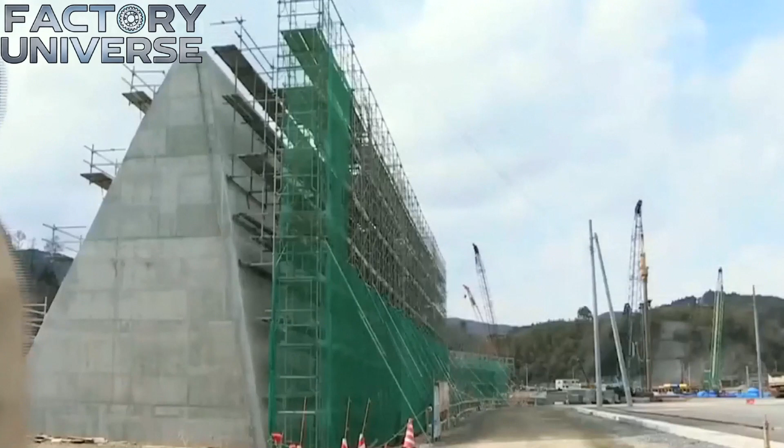20,000 people lost their lives in 2011, and hundreds of thousands of homes were completely obliterated when a tsunami 50 feet in height struck the coast of Japan. This catastrophic event left the international community in a state of profound shock and mourning. Why was such a high price paid in human lives and infrastructure?

At first glance, the natural defense systems of the time seemed sufficient. But in reality, the sheer force of the water overwhelmed every existing barrier, proving that a much more massive and sophisticated engineering solution was required to prevent a repeat of the disaster.

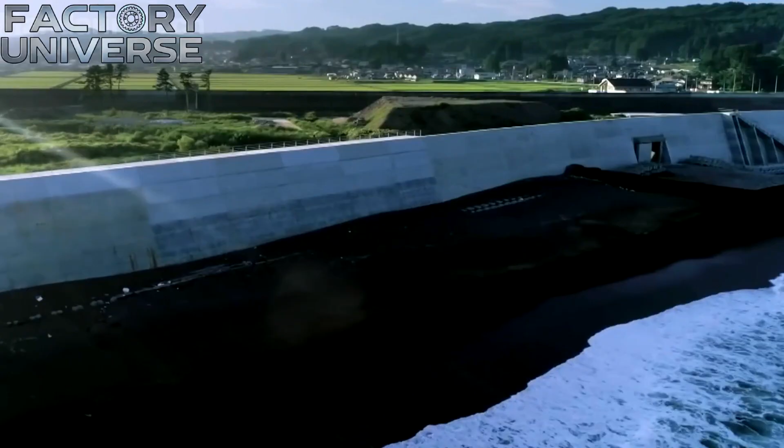Japan initiated the construction of a colossal tsunami defense wall, spanning nearly 250 miles along its vulnerable eastern coastline. But this is just the beginning. The process is only gaining momentum as the scale of the task demands unprecedented resources and precision. One can notice how tens of thousands of engineers and construction specialists are mobilized across the shoreline to manage the logistical complexity of the project.

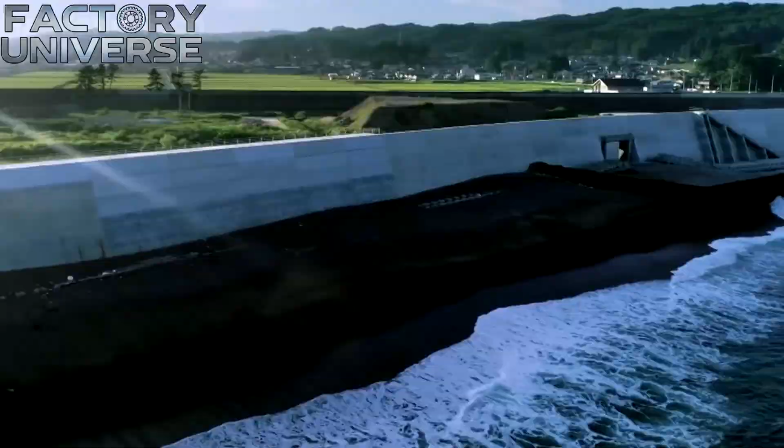To construct barriers reaching heights of 50 feet, they utilize world-class machinery capable of pouring and shaping millions of tons of high-strength concrete. It is visible how the heavy equipment moves with mechanical rhythm, positioning steel reinforcements and enormous blocks that must absorb the kinetic energy of the ocean. Each section of the barrier is calibrated down to the last millimeter to ensure structural integrity under the weight of millions of tons of rushing water.

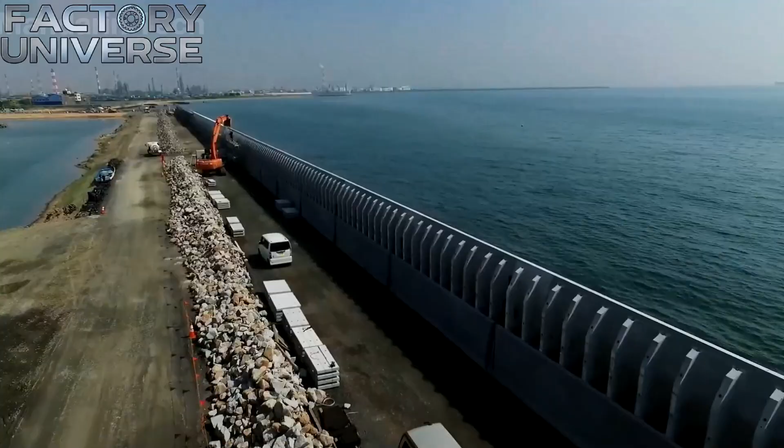Everything only gets more complicated when considering the long-term effectiveness of such a massive undertaking. The process does not end at the completion of the physical structure itself. One big question remains regarding whether this concrete Great Wall can truly provide absolute protection against the unpredictable tsunamis of the future. The structure stands as a testament to human engineering and resilience in the face of nature. The massive concrete panels now line the horizon, where the barrier meets the sea in a quiet, gray expanse.

4 massive tectonic plates converge directly beneath the Japanese archipelago, creating a geological junction of extreme instability. Why does this specific seafloor location generate more than 500 earthquakes every single year? The answer lies in the constant grinding and slipping of the Earth's crust as these plates collide under immense pressure. But this is just the beginning.

When these geological plates shift suddenly beneath the ocean floor, the entire seabed can rise or sink within seconds. This sudden deformation of the Earth pushes up enormous volumes of water, creating tsunami waves dozens of feet high. These waves accelerate toward the shoreline with the concentrated force of millions of tons of water. One can notice how the ocean surface seemingly transforms into a solid, moving wall.

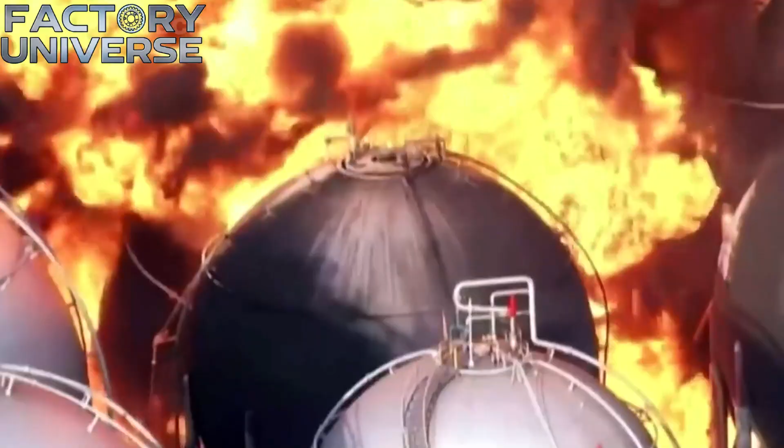In previous decades, residents of small coastal towns instinctively ran toward high ground the moment the Earth began to shake, responding to red alert warnings broadcast over loudspeakers. At first glance, these precautions seem sufficient, but in reality, the scale of natural forces can exceed any historical precedent. March 11, 2011, provided the most devastating proof of this persistent danger.

A magnitude 9.0 earthquake ruptured more than 300 miles of a tectonic plate boundary deep under the Pacific Ocean. The resulting tsunami reached heights of nearly 50 feet, far beyond any defense mechanism the nation had ever prepared for. It is visible how such a volume of water can bypass any standard obstacle. That single wave took more than 20,000 lives and flattened over 120,000 homes. The disaster triggered a catastrophic crisis at the Fukushima nuclear power plant.

It gets more complex further on. Existing seawalls had been designed only for waves up to 26 feet, causing them to be completely overwhelmed as the water surged over their crests. Japan quickly recognized that while the earthquake caused the initial damage, the tsunami acted as the primary destroyer of the coastal infrastructure. Nearly 250 miles of tsunami defense walls now line the northeastern coast as a result of this realization.

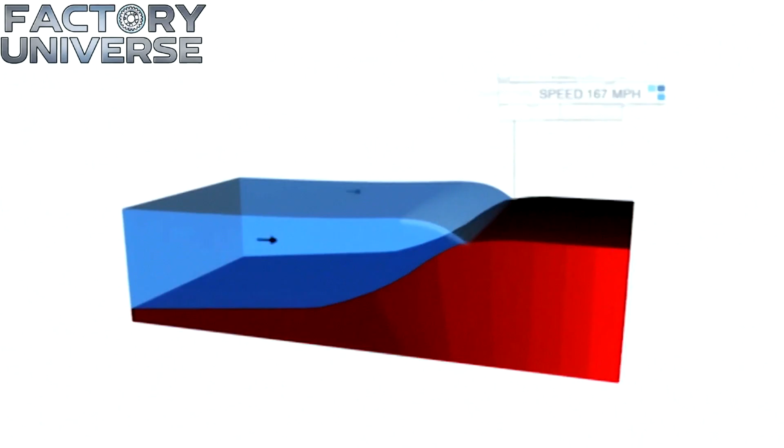Each structure stands between 45 and 50 feet tall, with heavy foundations plunging 80 feet deep into the ground. Everything only gets more complicated when considering the engineering required to anchor these massive concrete barriers. The government invested more than $12 billion not only into the construction of these walls, but also into the complete upgrading of emergency alerts and evacuation routes.

One can notice the precision of the new concrete blocks, forming a continuous line against the horizon. The equipment gradually moved millions of tons of material to ensure the foundations reached their required 80-foot depth. This concrete Great Wall is designed to buy precious minutes for residents to reach safety before a wave arrives. It does not end at this stage.

Automated sensors now link the walls to centralized warning systems that trigger the moment a plate shift is detected. The process of fortification serves as a physical commitment to preventing a repeat of the 2011 tragedy. The massive structures stand silent and ready, marking the completion of this phase of coastal protection.

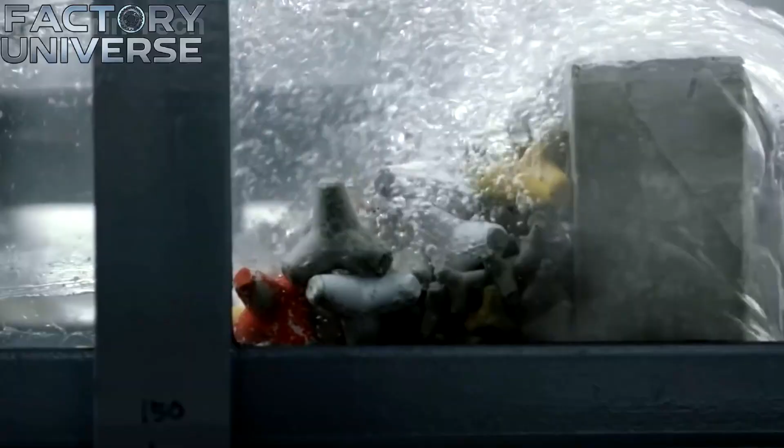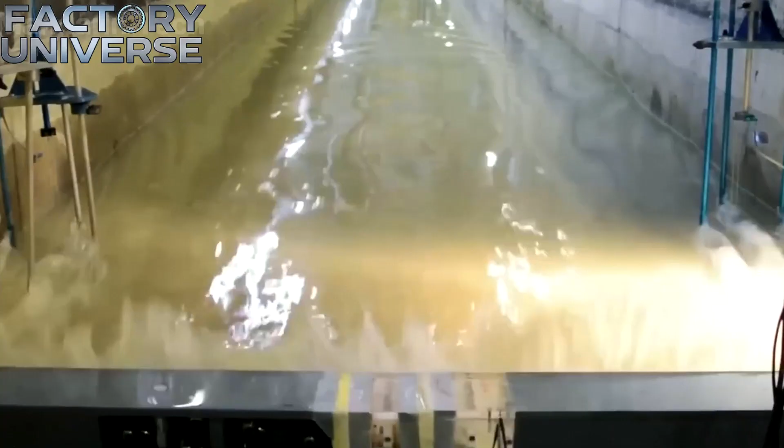14 meters. This is the minimum required height for the colossal concrete barriers designed to shield the Japanese coastline. Why is such an immense scale necessary for a structure that remains dry for decades? At first glance, a wall is a simple physical obstacle, but in reality, its geometry must counteract the fluid dynamics of a multi-ton surge that behaves more like a moving wall of earth than water.

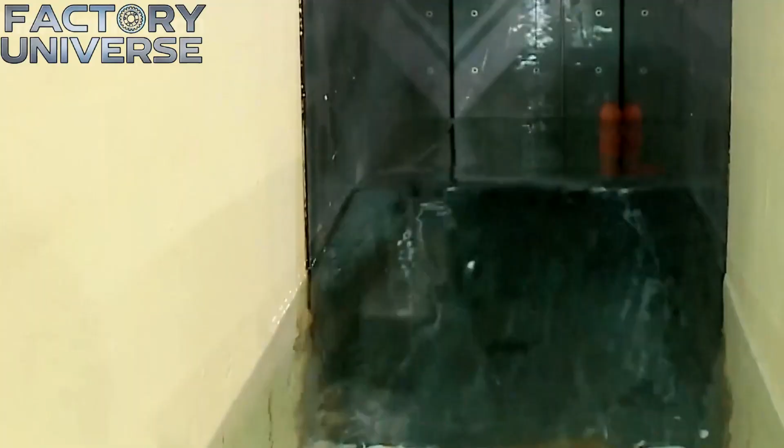The process begins not with concrete, but with the systematic analysis of every data point recovered from the 2011 disaster. Engineers meticulously reconstructed the destructive force of the waves within specialized artificial wave tanks. One can notice how hydraulic actuators push the water to mimic the exact frequency and velocity of the historical event. These scaled-down models allow the team to observe how the liquid mass hits the surface and eventually overtops the barrier.

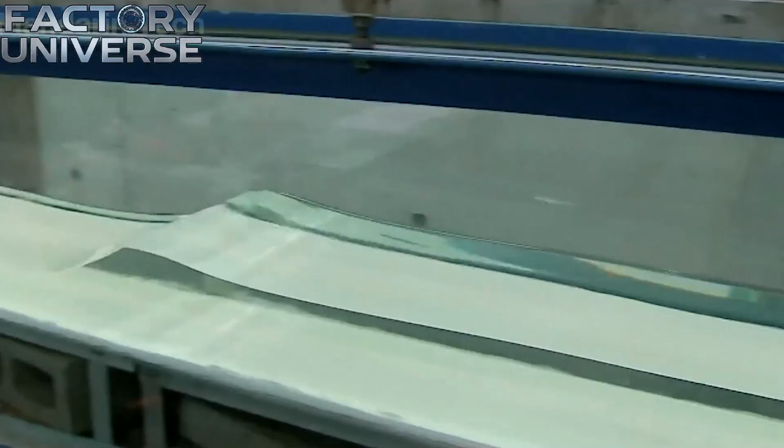It gets more complex further on. The research phase does not end at this stage. Scientists continuously adjusted the thickness, the vertical slope, and the overall height of the wall based on how the miniature models responded to varying pressures.

It is visible how the water creates a vacuum effect and a massive lateral push that could easily topple a standard structure. To counter this, the design moved toward a wide trapezoid base that lowers the center of gravity and distributes the weight more effectively. Only after the models demonstrated peak performance did the engineering team finalize the technical blueprints.

The foundations are driven 20 to 25 meters deep into the earth to anchor the structure against the immense kinetic energy of a surge. These deep piles ensure the wall is not pushed over or undermined when the water levels rise past the top edge. Everything only gets more complicated when considering the internal structure. A reinforced steel core provides the necessary tensile strength to prevent the concrete from shattering under impact.

The final specifications call for a height of 14 to 15 meters, creating a massive shield capable of withstanding the most extreme geological events. The design phase successfully concludes, providing the foundation for the massive construction efforts that follow.

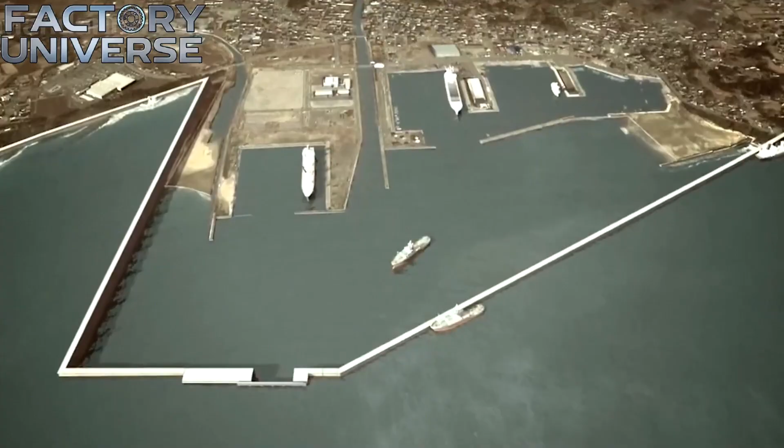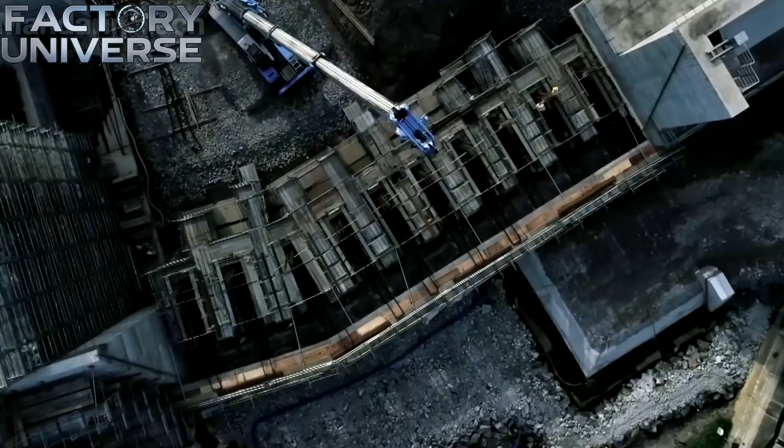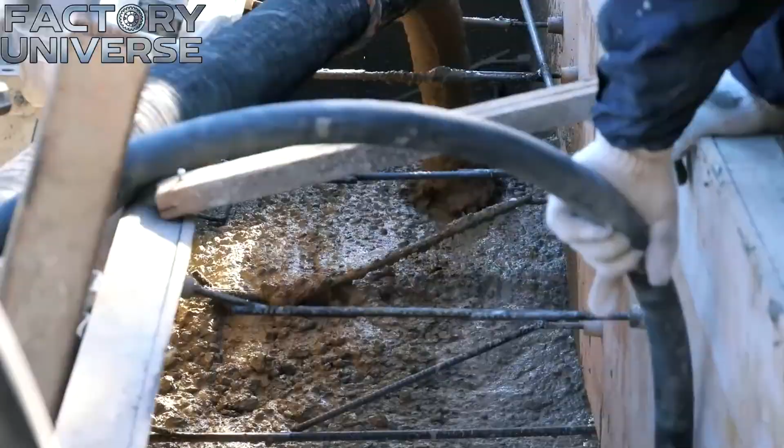400 kilometers is the total length of the massive coastal defense line spanning the Tohoku region in northeastern Japan. Why was such an immense distance selected for a single unified project? After the catastrophic events of 2011, engineers determined that only a continuous barrier through the prefectures of Aomori, Iwate, Miyagi, and Fukushima could provide the necessary protection. This stretch now represents the longest and most integrated defensive fortification in the history of the nation.

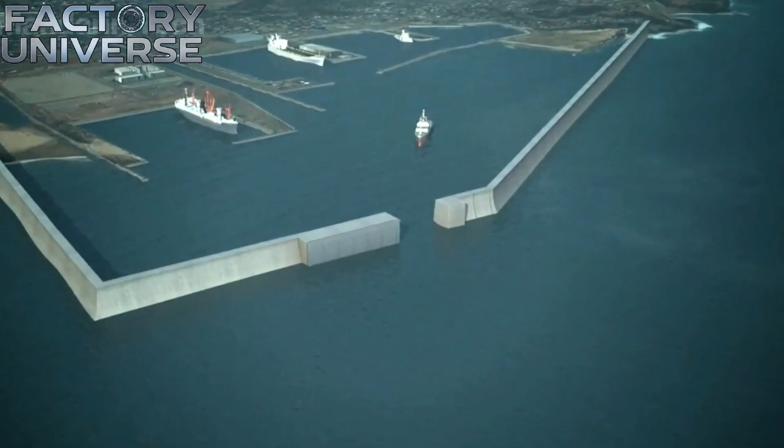Crews began the process by clearing the designated route of all remnants from the previous disaster. One can notice how hydraulic manipulators systematically remove destroyed infrastructure, power lines, and old pipelines to create a clean corridor. But this is just the beginning. Logistics hubs and concrete mixing stations were established immediately along the coastline to ensure a constant supply of materials.

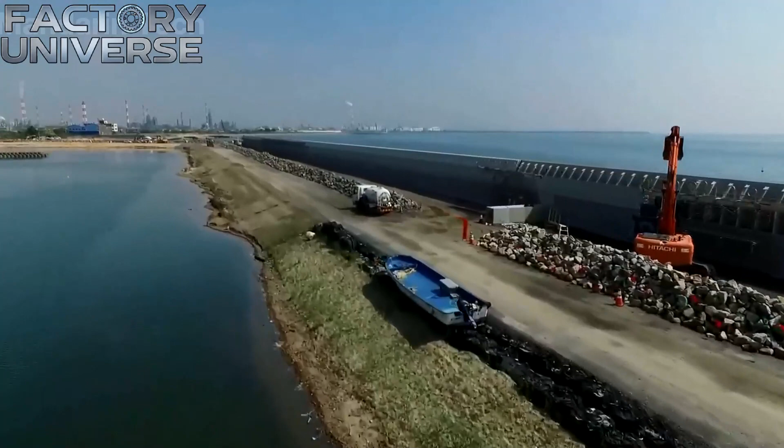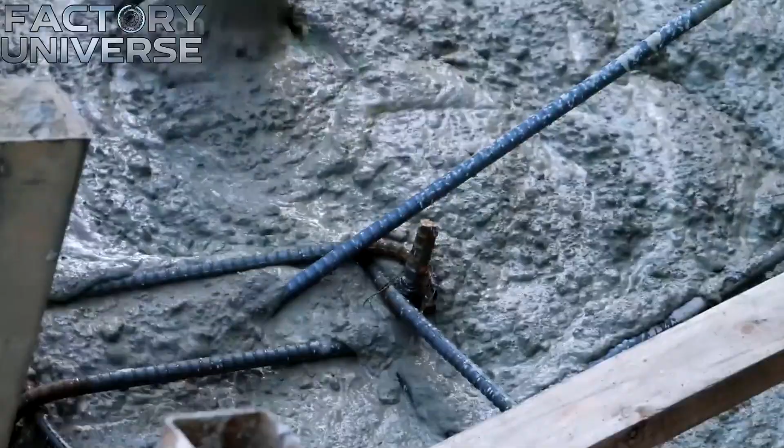Because the rainy season in Japan can halt most industrial activity, workers installed temporary drainage systems and specialized crane platforms to maintain the pace of construction regardless of the weather. It looks outwardly simple to prepare a site, but in reality, the proximity to the ocean requires constant monitoring of the water table. Engineers focused their attention on the weak, sandy soil that characterizes much of the Tohoku coast.

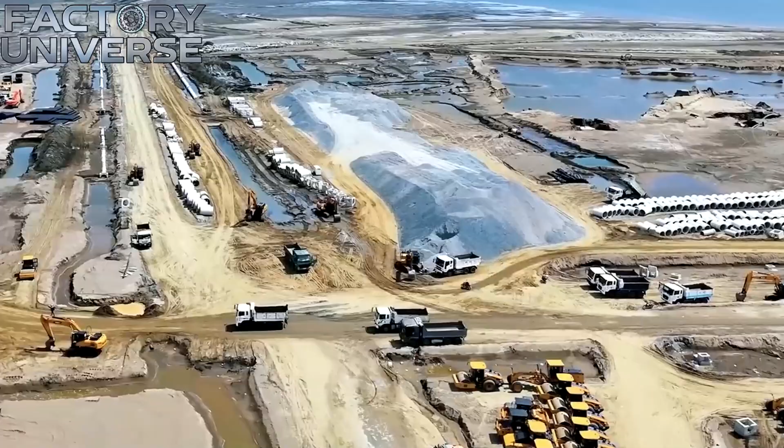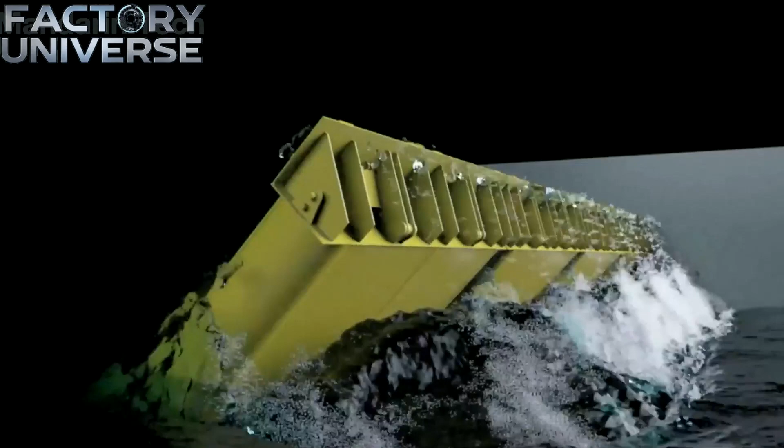It seems simple to build on the shore, but in reality, the weight of the structure requires massive ground reinforcement to prevent sinking. They drilled detailed geological surveys before driving deep concrete and steel piles into the earth to find stable strata. Layers of crushed stone and sand were added and then compacted using heavy vibrating rollers to create a base that will not slide or crack under the weight of a wall tens of meters tall.

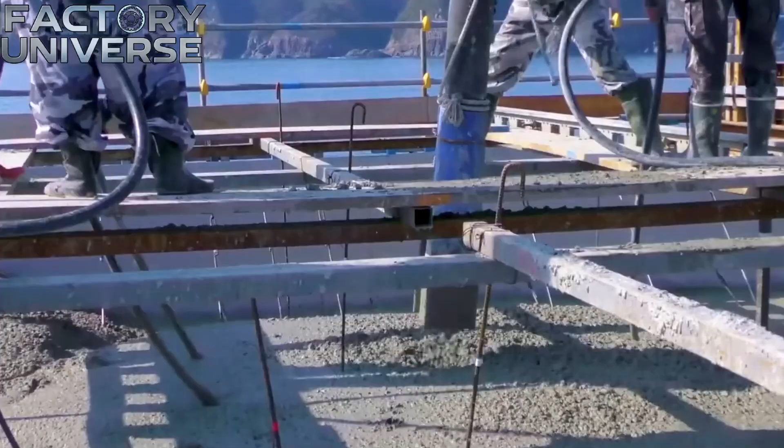Excavators dug foundation pits that reached depths of more than 20 meters in specific sections. Near the shoreline, crews built temporary cofferdams to keep the seawater from flooding the active work zones. The process is only gaining momentum.

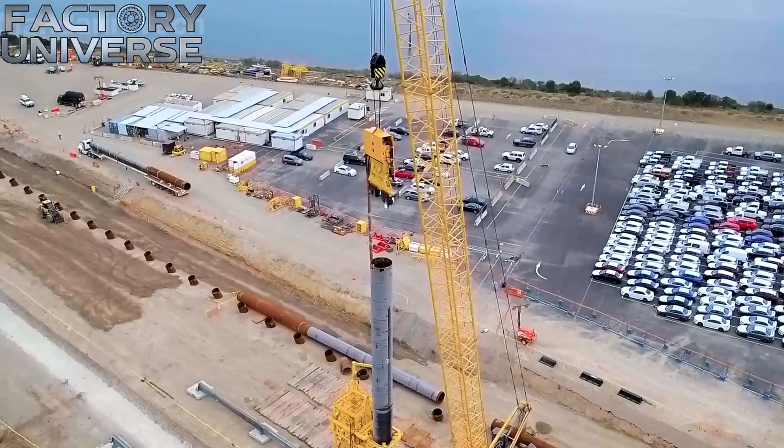Once the pits were cleared, a base layer of concrete was poured to serve as the platform for dense steel reinforcement cages. These foundation blocks are built with an extremely wide footprint to ensure the wall cannot be overturned by the massive kinetic energy of a surge.

Workers assembled thick rebar cages above these foundations, following the precise specifications developed during laboratory testing. One can notice how the formwork is positioned before concrete is pumped into the molds in a continuous stream.

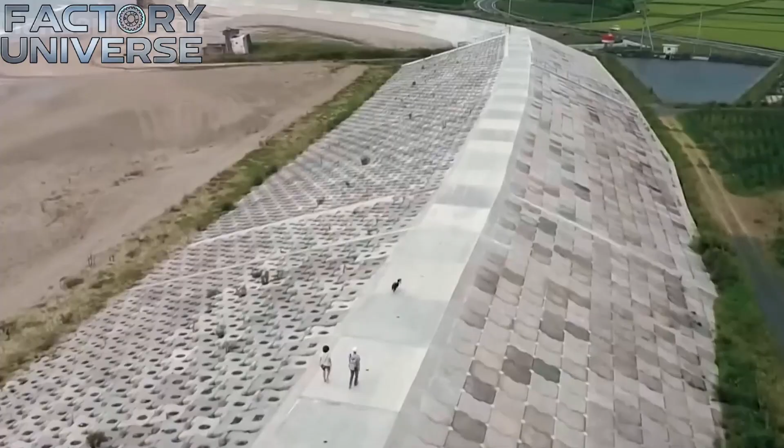Each block, typically measuring several dozen meters in length, undergoes a strict cycle of pouring, curing, and inspection. These individual sections are then connected to one another to form a single unbroken barrier along the Pacific edge.

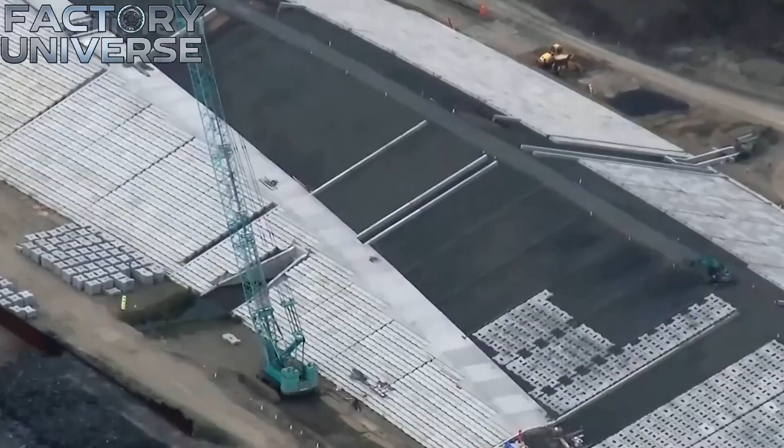Specialized energy-dissipating units like tetrapods and dolos are installed on the ocean-facing side of the structure. These concrete blocks are stacked in multiple dense layers at the base to break the initial force of a wave before it ever touches the main wall. Everything only gets more complicated as the terrain changes.

Some sections utilize stepped faces or sloped surfaces to reduce the height of water surges, while the landward side is reinforced with crushed rock and drainage channels to prevent the accumulation of rainwater.

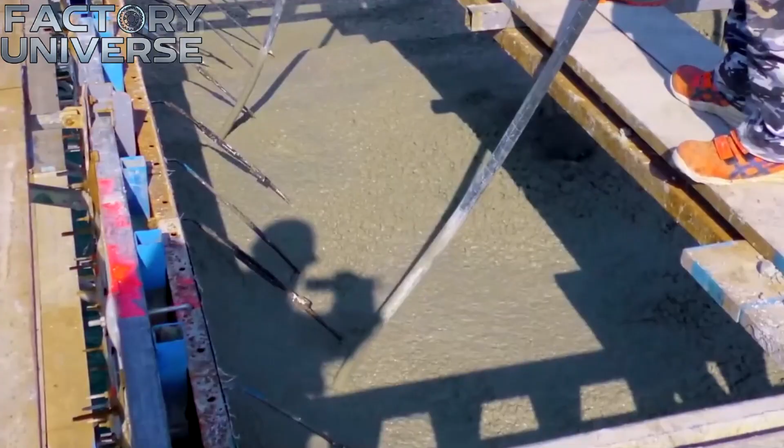The top of the wall often serves a dual purpose as a public walkway or a local roadway for the town. Railings and safety ladders are integrated into the final structure to allow for safe access and maintenance. Transition to the next level.

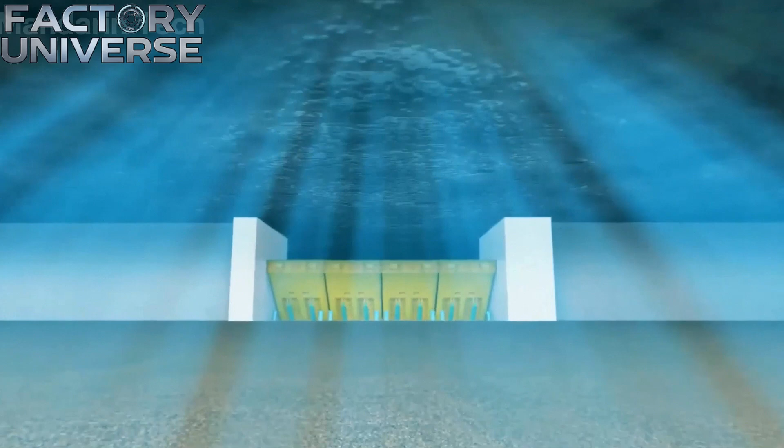Because the project spans nearly 400 kilometers, engineers made minor adjustments to the design to account for variations in coastal depth and soil composition without altering the core architectural principle. Interlocking precast concrete blocks were added to the outer surface in areas requiring extreme impact resistance.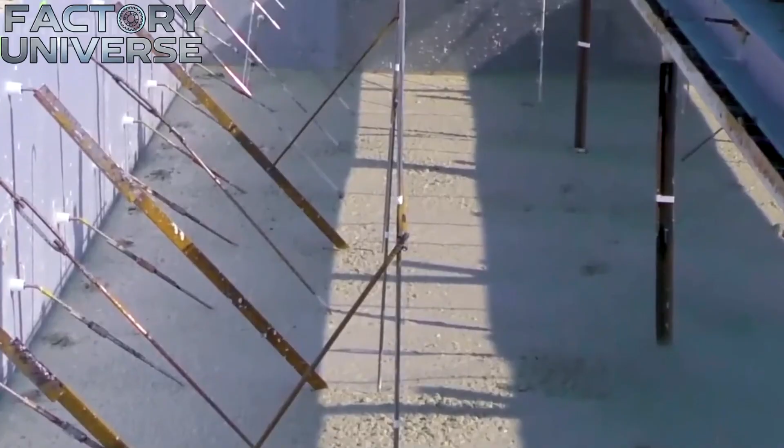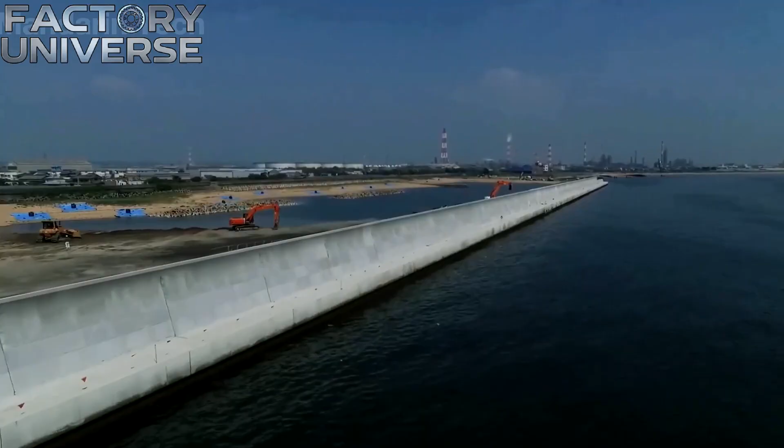One can notice the crane lifting these panels into a tight, uniform pattern that functions as a reinforced armor layer. This protective skin is designed to withstand decades of constant erosion and the relentless pounding of the Pacific Ocean.

Special entry points had to be engineered for busy port cities like Iwaki to allow for uninterrupted maritime traffic. The first solution is a top-down tsunami gate consisting of a massive steel panel suspended between two towering concrete pillars.

It only looks obvious to leave the harbor open, but in reality, these gates must close in minutes. Driven by hydraulic motors and pulley systems, the steel panel drops vertically during a warning to seal the entrance completely.

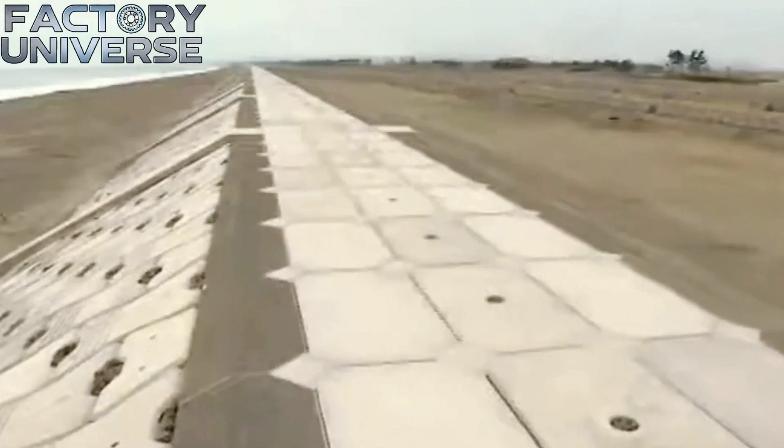Japan also utilizes bottom-up rising gates in harbors where overhead clearance is restricted. Under normal conditions, the entire gate assembly lies flat on the seafloor, allowing ships to pass overhead without any obstruction

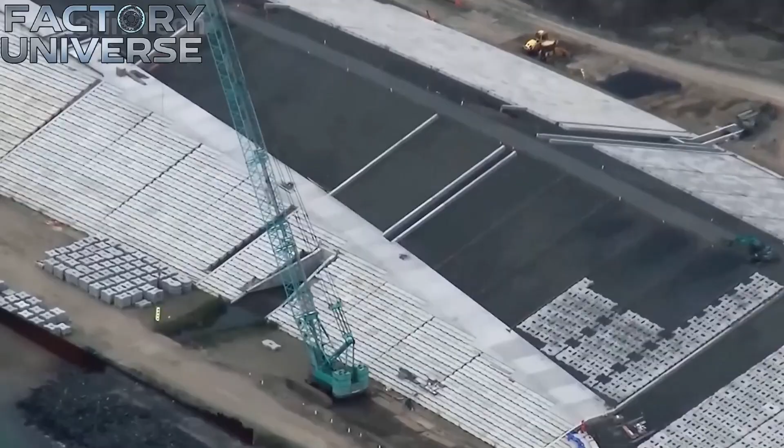24 hours a day. When sensors detect an approaching tsunami, a hydraulic system pivots the gate upward from the seabed until it locks into the sidewalls. Because the mechanical components remain submerged, they are manufactured from highly corrosion-resistant steel with fully sealed hinges to resist the pressure of seawater and sand. The material is ready to serve as a permanent shield for the coastal communities.

400 kilometers is the total length of the continuous coastal defense system stretching along the Tohoku coastline. Why was such a massive engineering undertaking necessary across this specific expanse of Japan? At first glance, the scale of the barrier seems insurmountable, but in reality, it serves as a calculated response to the devastating kinetic energy of the Pacific Ocean.

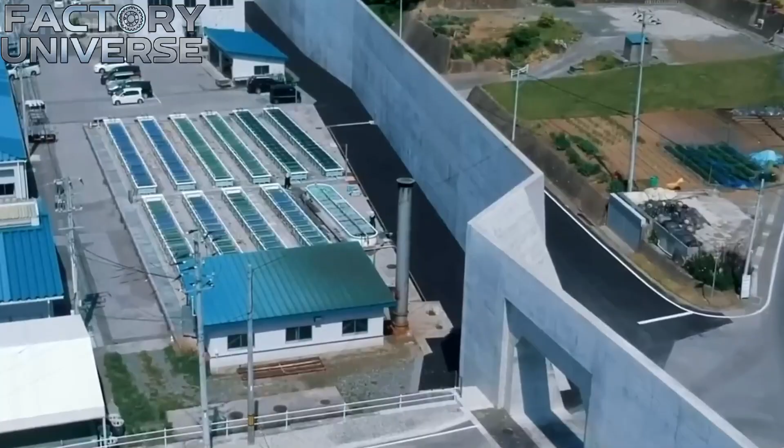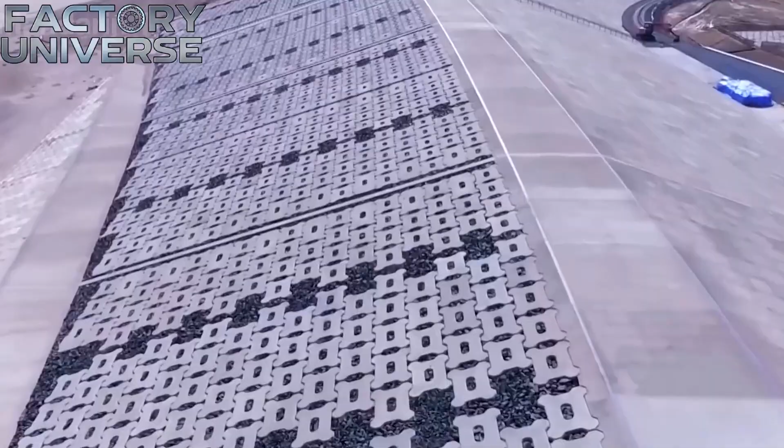This structure now stands as the largest defensive maritime wall ever constructed in the history of the nation. The project required a financial investment exceeding $12 billion to reach completion. Engineers, geotechnical specialists, and construction workers, totaling more than 30,000 individuals, were mobilized to execute the technical plans.

One can notice how thousands of units of heavy-duty machinery operated without interruption for a period of 5 to 7 years. The process is only gaining momentum as various sectors of the coastline were addressed.

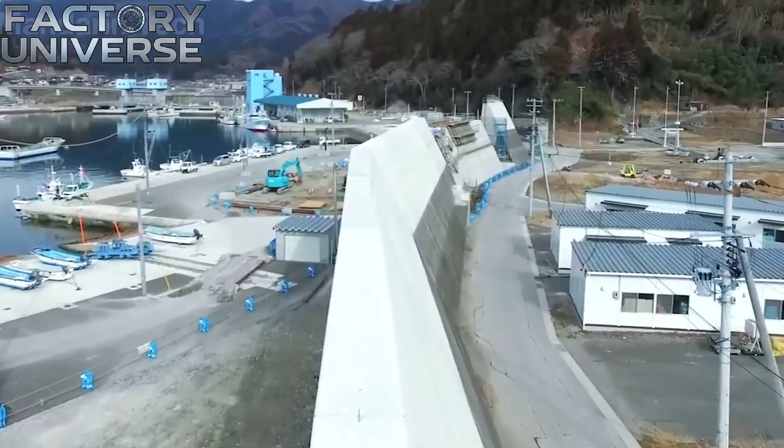Hundreds of wall segments rose simultaneously along the shore, each demanding a unique approach to its structural integrity. Depending on the specific characteristics of the local terrain, specialists applied different foundation treatments and reinforcement techniques to the concrete segments.

It only looks obvious to build a uniform wall, but in reality, the subsurface conditions required constant adaptation of the reinforcement steel and casting methods. The equipment gradually moved from one completed section to the next, ensuring the barrier remained unbroken. Everything only gets more complicated when considering the sheer variety of soil densities encountered over the 400-kilometer stretch.

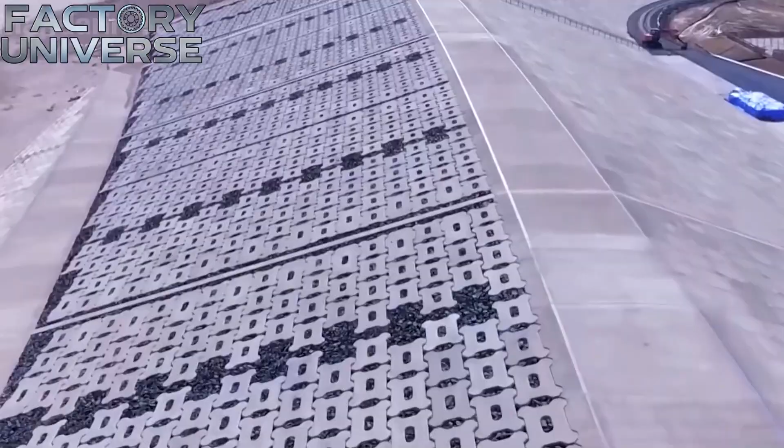Simulation data indicates that the operational seawall system reduces the impact forces of a tsunami by 30 to 50%. These precise calculations translate into several additional life-saving minutes for coastal residents to reach higher ground during an evacuation. This time frame is sufficient to protect tens of thousands of people during a Level 1 tsunami event.

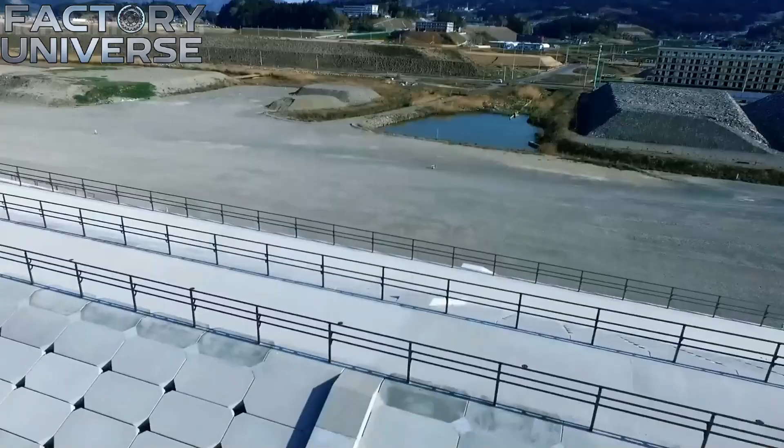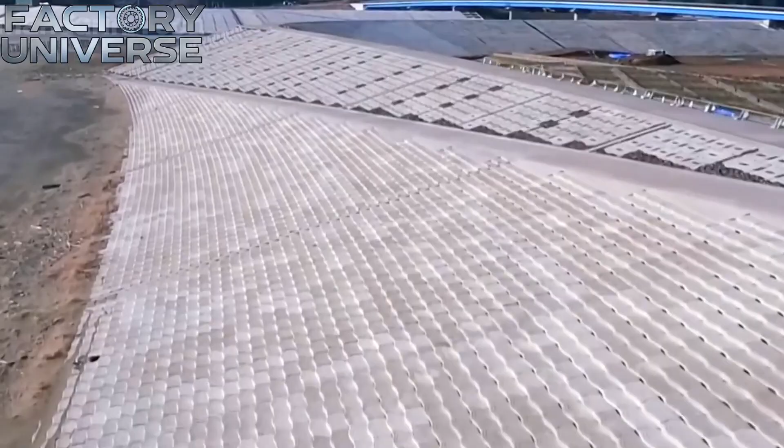One can notice how the concrete face of the barrier is designed to break the initial surge of the tide. But this is just the beginning of the protective measures integrated into the regional infrastructure. Fishing ports, coastal roads, and residential districts that suffered total destruction in previous events now exist behind this reinforced perimeter. The presence of the wall significantly lowers the probability of catastrophic damage when high-magnitude waves strike the coastline.

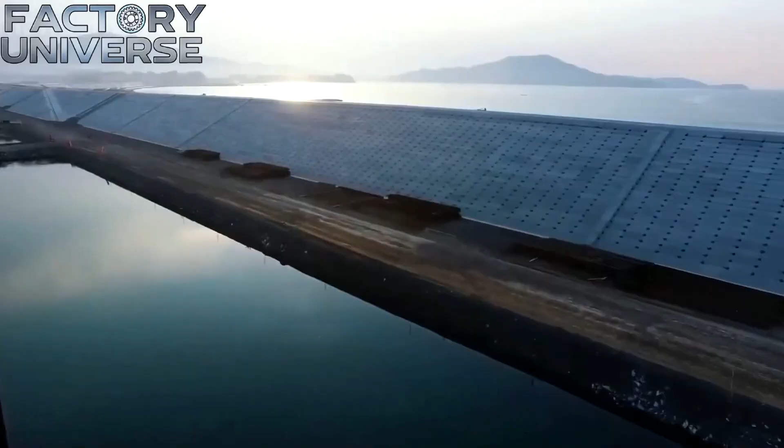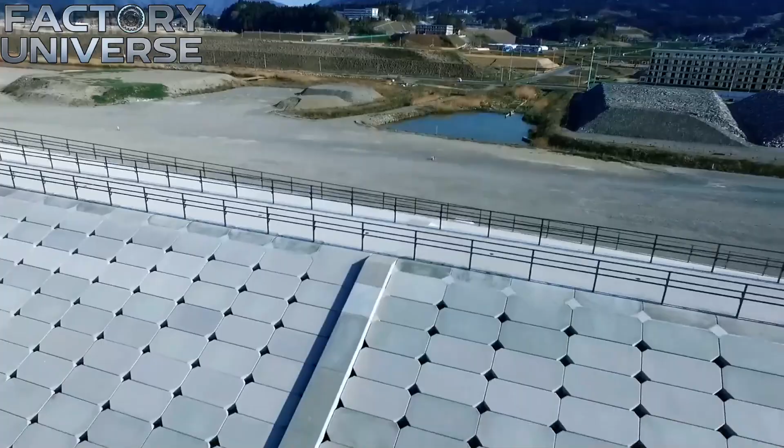It does not end at this stage, as the barrier functions as a primary shield for the vital economic assets of the Tohoku region. The camera glides along the top of the massive structure, showing its integration with the surrounding landscape. This 400-kilometer barrier represents the final line of physical defense for Japan against the most destructive natural forces on the planet. Although the system is not designed to stop every conceivable type of tsunami, it provides the country with a technical foundation for resilience and increased confidence.

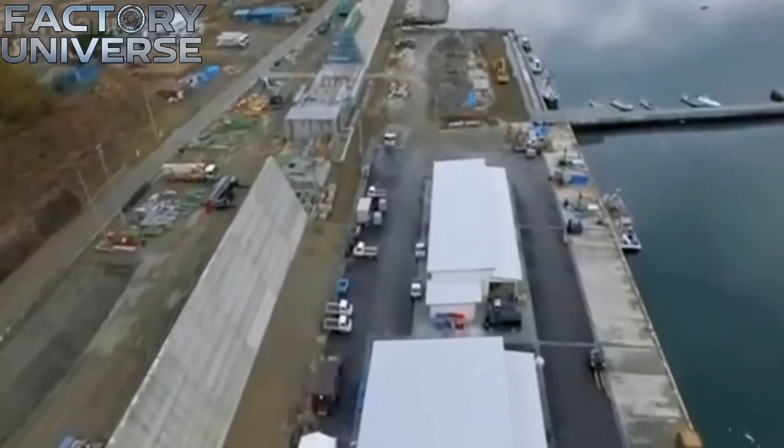The project concludes this phase of coastal fortification, leaving behind a landscape transformed by $12 billion of engineering precision. The massive concrete sections remain in place, ready to dissipate the energy of the ocean and secure the future of the communities living in their shadow.

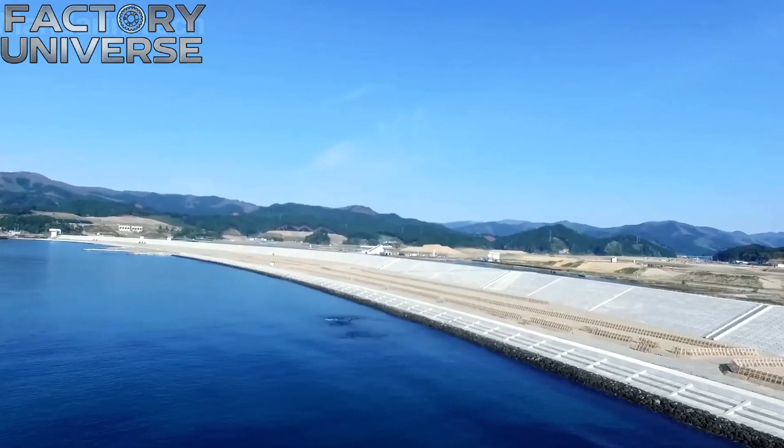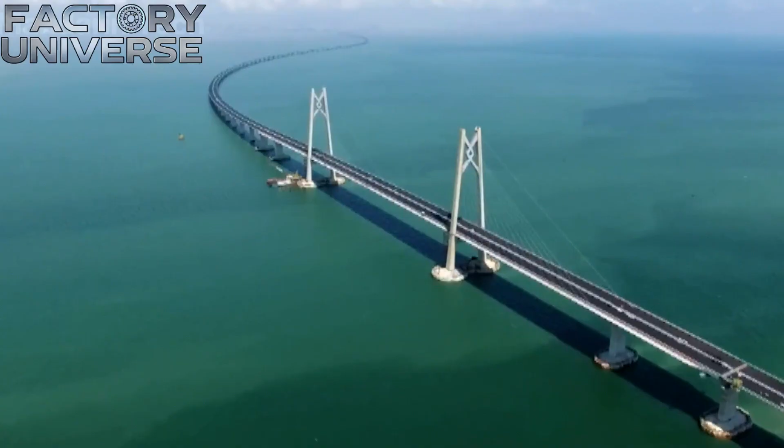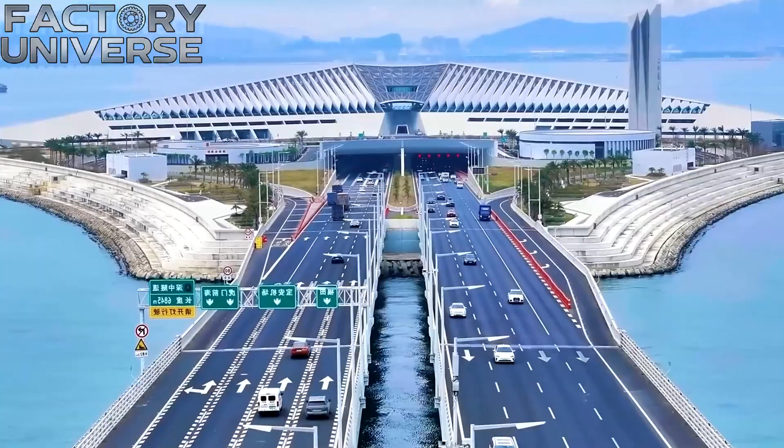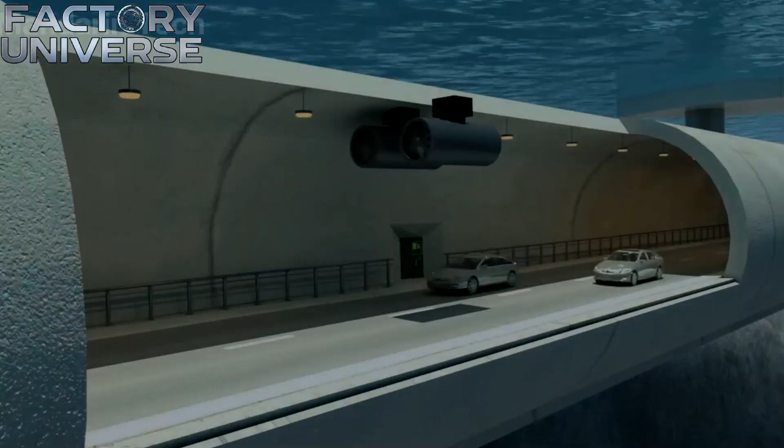Engineering in an environment completely isolated from the atmosphere demands unwavering precision as geological conditions change with every meter of progress. In the modern world, these underwater tunnels represent a crucial component of infrastructure that connects distant islands and spans deep bays. One can notice how these constructions create breakthroughs in mobility, where bridges or ferries can no longer accommodate the volume of transit. The process is only gaining momentum as these routes become vital economic arteries for busy port cities.

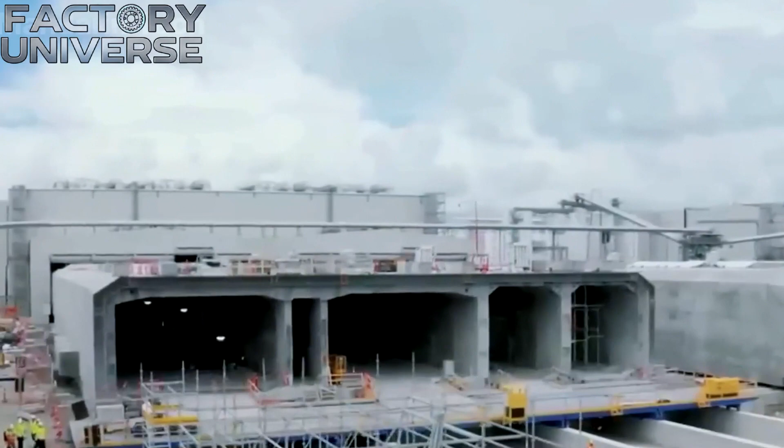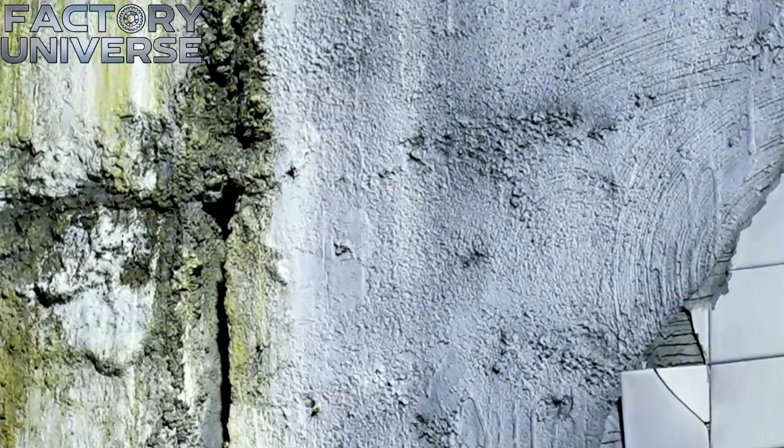Detailed geological surveys and meticulous preparation serve as the foundation for ensuring safety under the crushing pressure of the seabed. Engineers drill into the subsea topography to collect soil samples and analyze rock strata. This allows the team to determine bearing stability and identify latent hazards that could compromise the structure.

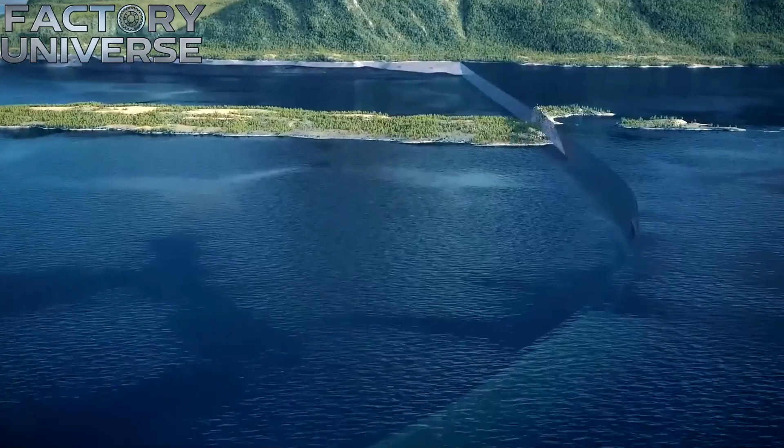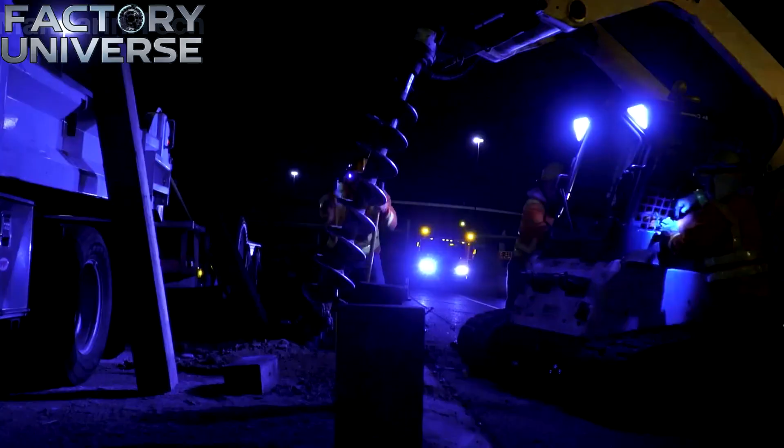Environmental considerations remain a priority throughout this initial phase. It is visible how the project team assesses potential impacts on marine ecosystems to ensure natural habitats are disturbed as little as possible. Transition to the next level involves active environmental protection. Noise mitigation measures are implemented during construction to shield marine life from industrial vibration. Technicians may even install artificial reef structures to provide new habitats for local species. But this is just the beginning.

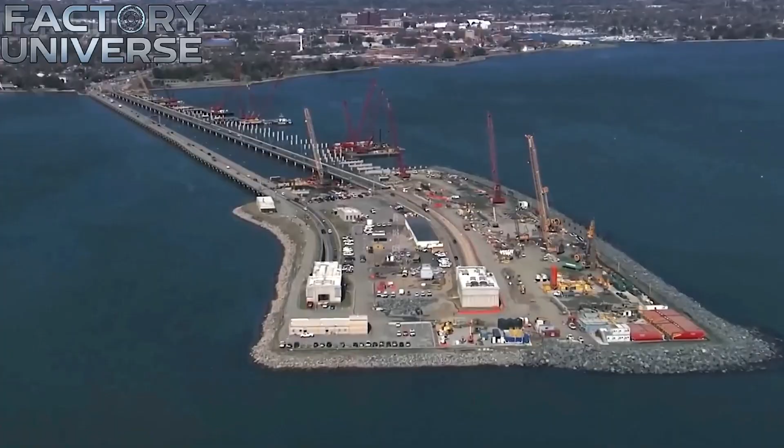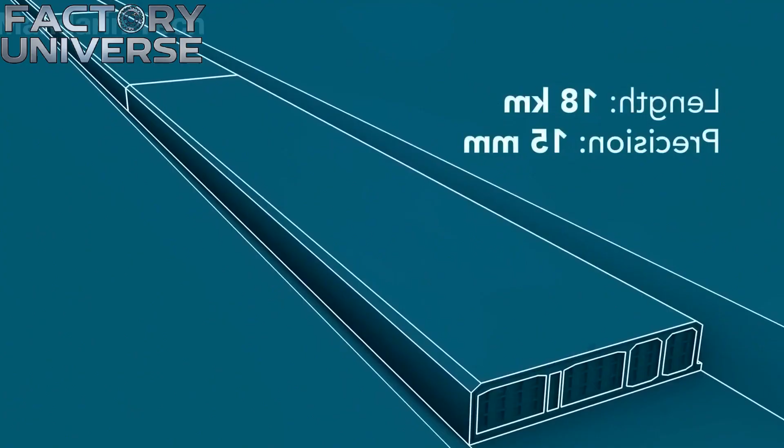The actual construction phase utilizes the immersed tube method to assemble the tunnel from prefabricated sections. Each standard element measures approximately 217 meters in length and is manufactured on land with near-perfect precision. Inside these massive segments, several distinct compartments are designed for specialized functions. One can observe two main chambers for highway lanes and one dedicated strictly to a railway line. A separate service corridor is integrated for future maintenance and inspection duties.

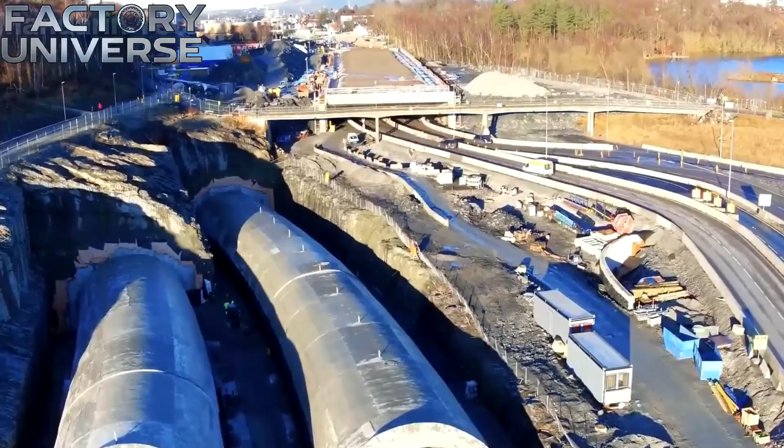Floating pontoons and specialized cranes transport these sections to the open sea once they are complete. The equipment gradually lowers the segments into pre-dredged positions on the seabed with millimeter control. Each segment is joined sequentially to form a continuous path of the required length.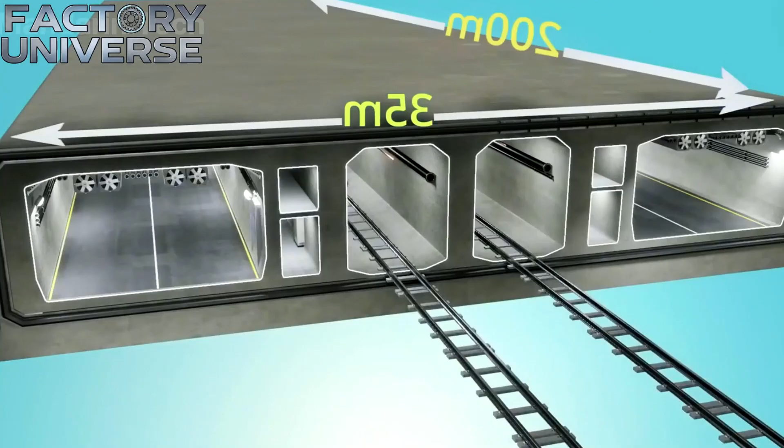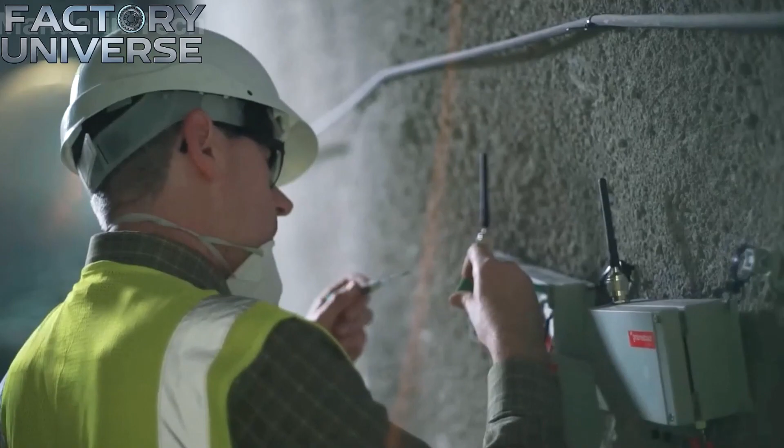The most critical phase of this operation lies in the execution of the joint connections. If the seals are not handled with jewelry-like precision, seawater infiltration could lead to catastrophic structural failure. Rubber gaskets are inserted between the segments to establish a watertight barrier. Simultaneously, layers of sand and gravel are placed above and around the tunnel to provide stabilization against buoyancy. Only after the connections are securely locked and stabilized are the temporary end bulkheads removed.

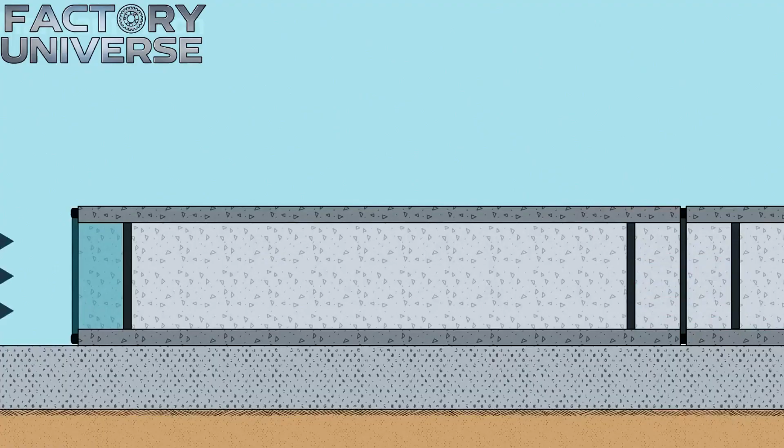Everything only gets more complicated when dealing with strong turbulence or complex underwater terrain. In such environments, the immersed tube method becomes impractical due to the difficulty of anchoring. This technique is specifically suited for areas with a stable seabed and gentle water currents.

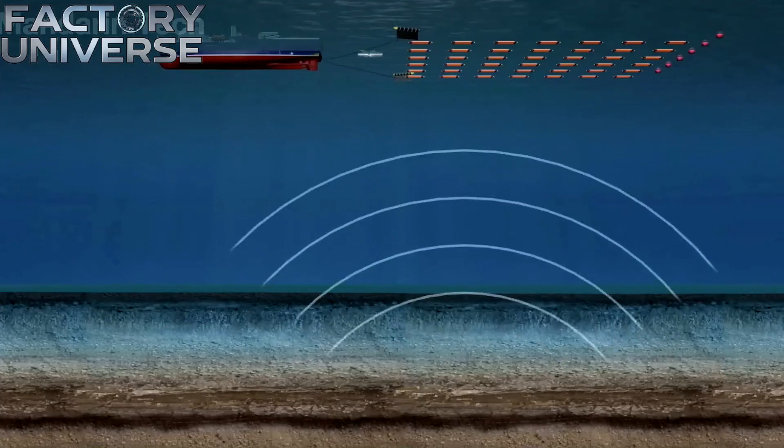Once the structure is sealed, the focus shifts to the internal safety systems and operational assessment. Many modern projects utilize a two-level design to double traffic capacity without expanding the external structural footprint. Drivers maintain a stable speed of 60 kilometers per hour while passing emergency exits positioned every 200 meters.

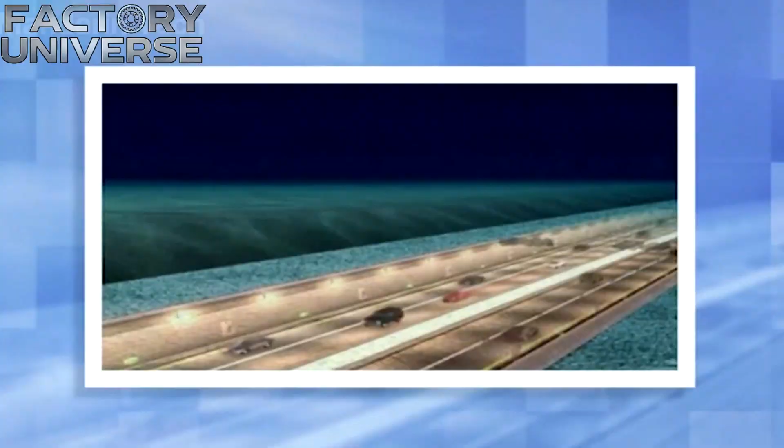Engineers conduct rigorous tests on waterproofing integrity, pressure resistance, and fire safety systems. Ventilation performance and structural stability are verified under maximum load conditions. Maintenance is what truly determines the longevity and safety of the tunnel after it opens to the public.

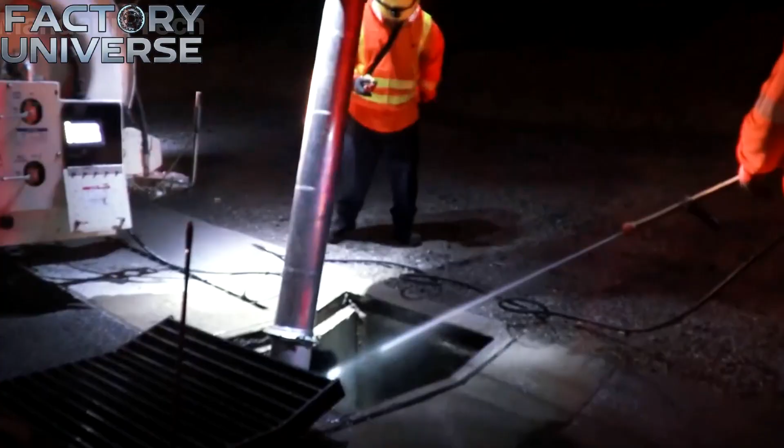Technical teams conduct regular inspections of the concrete lining and the waterproof membranes. They search for any signs of deformation or cracking in the support frames and drainage systems. Hundreds of sensors installed along the length of the tunnel continuously monitor pressure, temperature, humidity, and vibration. Real-time data flows to a central control room where engineers analyze the earliest signs of structural fatigue.

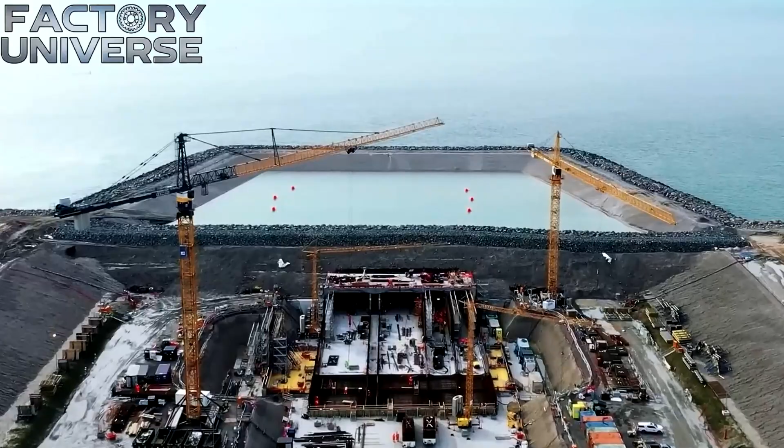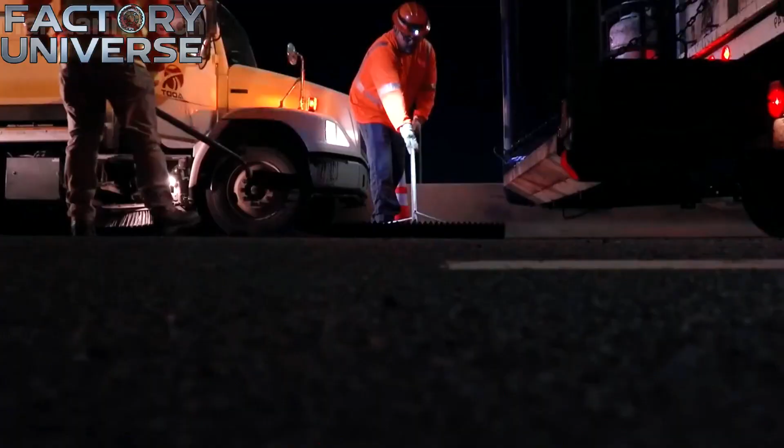One can notice specialized vehicles equipped with high-pressure water jets and suction systems performing periodic cleaning. These machines remove sediment and keep the tunnel floor clear to prevent blockages in the drainage network. Through the integration of advanced sensor technology and manual maintenance routines, these tunnels operate safely for many decades.

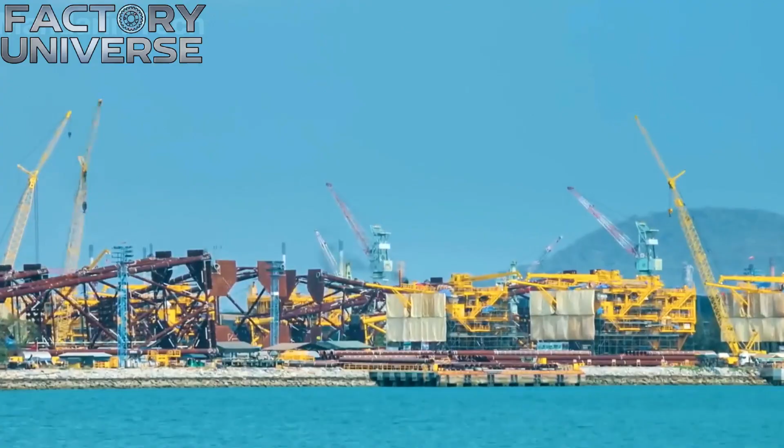The molten stream of logistics and transit continues through the ocean depths as a testament to engineering resilience. The material and the structure reach a state of equilibrium with the surrounding environment, and the construction phase concludes. 120 meters of depth is the technical limit reached by the undersea tunnels that now traverse the Japanese seabed. Why are these coastal fortifications and deep water passages engineered with such extreme durability?

To the eye, a concrete seawall appears to be a simple static barrier. But in reality, every cubic meter is calculated to withstand the immense kinetic energy of a tsunami wave. These massive megastructures represent the peak of maritime engineering across the island nation. One can notice how the reinforced concrete structures rise dozens of meters above the shoreline to protect vulnerable coastal zones.

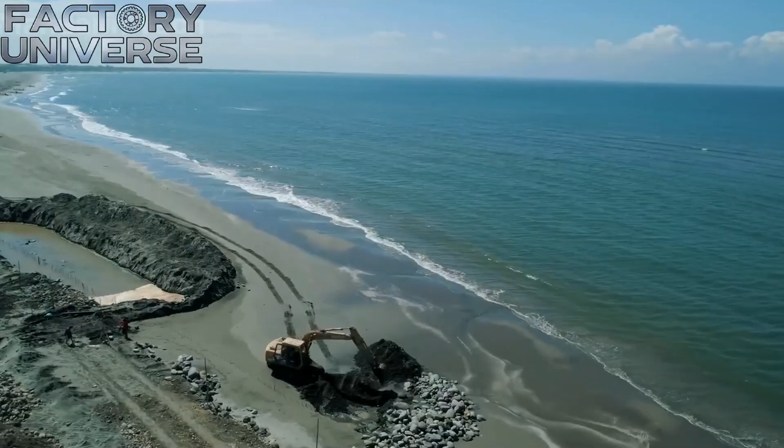This process is only gaining momentum. Automated sensors and heavy-duty floodgates operate in a continuous state of readiness to seal off inland areas from the ocean. The equipment gradually monitors the structural integrity of every seawall and tunnel segment. Japan demonstrates how advanced engineering can be synchronized with the unpredictable forces of nature. But this is just the beginning.

It is visible how the nation focuses on the resilience of its infrastructure following every major seismic event. Engineers implement seismic isolators and deep-sea reinforcements to ensure that undersea tunnels remain stable during tectonic shifts. Transition to the next level. Huge hydraulic systems and massive breakwaters are positioned along the coast to dissipate the force of the waves.

At first glance, the construction of these barriers seems like a standard civil engineering task, but in reality, it requires a unique chemical composition of concrete to resist saltwater corrosion for decades. The material lays in an even layer across the shoreline, forming a protective perimeter that guards the population. Everything only gets more complicated as global engineering standards continue to evolve.

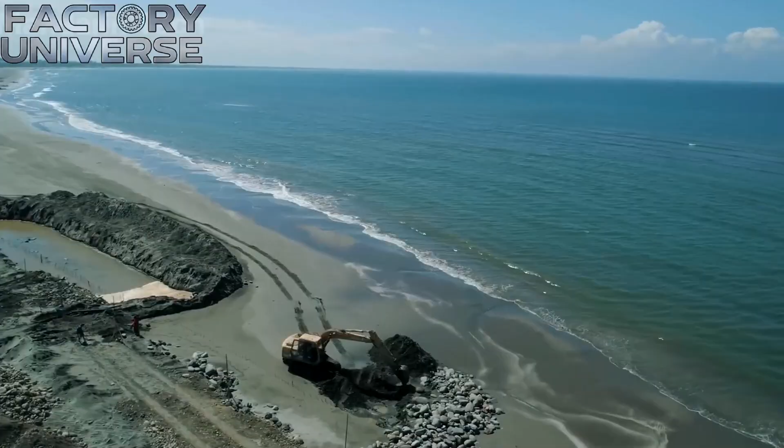Therefore, the study of these incredible megaprojects continues beyond the borders of a single country. Global industrial complexes are currently developing new methods to build similar structures in various geological conditions around the world. The process of exploring these large-scale technical achievements remains a continuous endeavor for engineers and researchers alike.

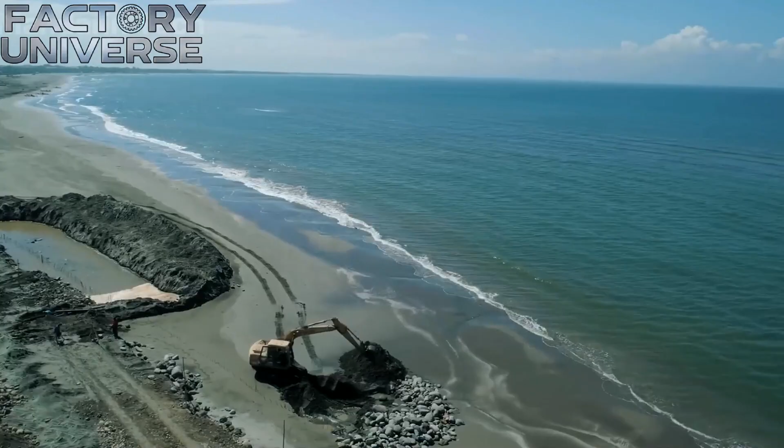Thus, the technical analysis of these ocean-facing fortifications reaches its conclusion, providing a foundation for understanding the next phase of global infrastructure development. The material is ready to move to the next processing phase without haste.